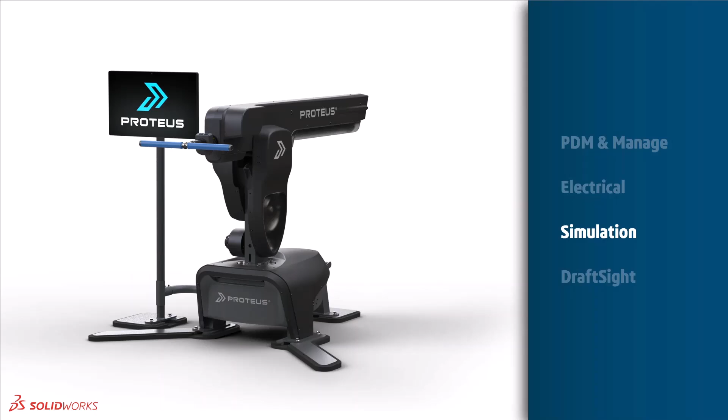My name is Ed Hawkins, and over the next few minutes I will take you through the updates to simulation in SOLIDWORKS 2025. The Proteus Motion is a training tool built to perform for professional athletes. This handle is how the athlete connects to the machine, and ensuring the athlete's safety while using the Proteus Motion is extremely important. The handle needs to be both strong enough to endure the forces of a Major League Baseball swing and lightweight enough to simulate the feel of the bat in the hitter's hands.

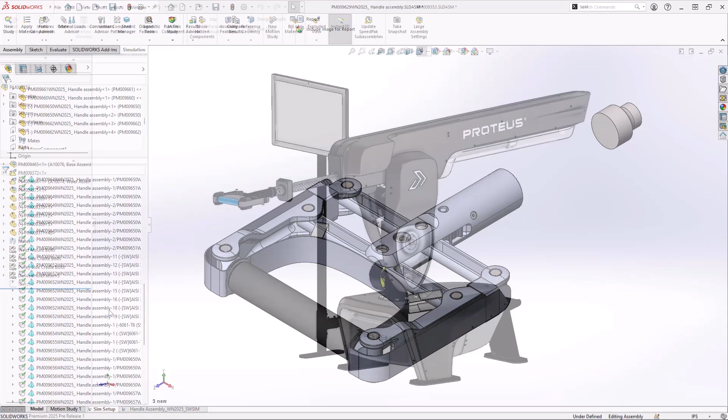It is a highly designed assembly that will need to be virtually tested to meet all of the design's criteria. Let's take a look at how we can use some new features in SOLIDWORKS 2025 to speed up the analysis of this handle and also increase the accuracy of the results.

Firstly, there are several components that are required for the handle to function properly, yet many aren't integral to the handle's structure. New in 2025, we can now select the structural components we want to keep in the analysis and exclude all the others. This is a huge time saver when working with large assemblies.

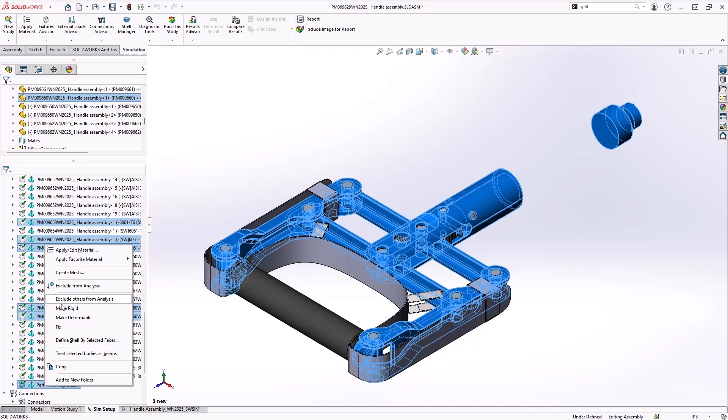These moving parts are all connected with pins. Virtual hardware is a great way to reduce the overall scope of the analysis without sacrificing accuracy. Now virtual pins can be defined using distributed coupling technology, which more accurately transfers loads to the surfaces where the pins are located, increasing the overall accuracy of the analysis.

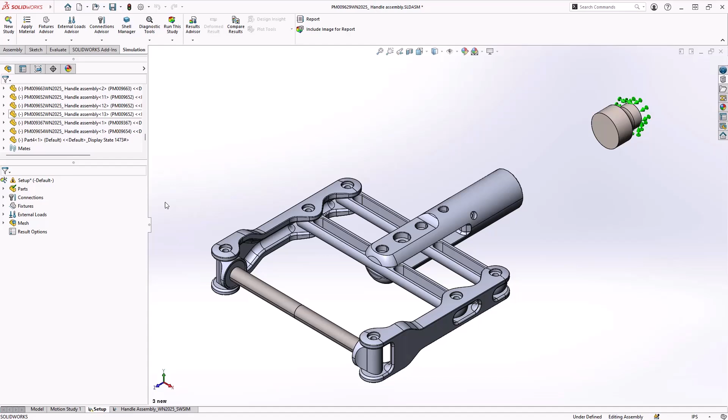This handle is connected to the rest of the Proteus Motion machine, but adding a rigid boundary condition would over-constrain the model. In reality, there is some compliance to the rest of the machine, which would act as a stiff orthotropic spring. New in Simulation 2025, a new orthotropic spring type can be defined with unique stiffness values in all orthogonal directions, plus torsional and bending stiffness as well.

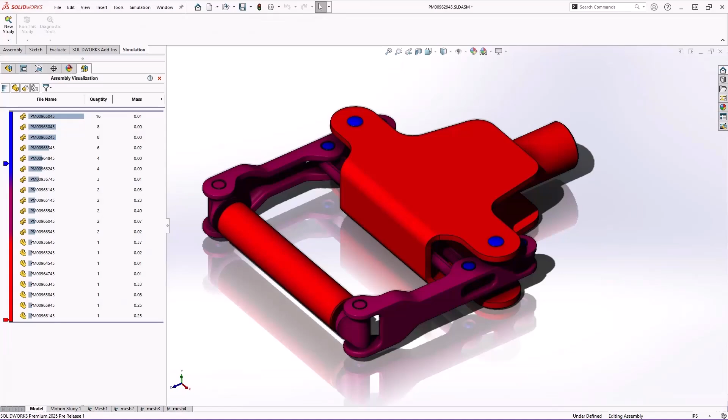Before we run the study, we'll need to mesh the model, and in 2025, assemblies that contain identical parts will mesh up to 15% faster while using the blended curvature-based mesher.

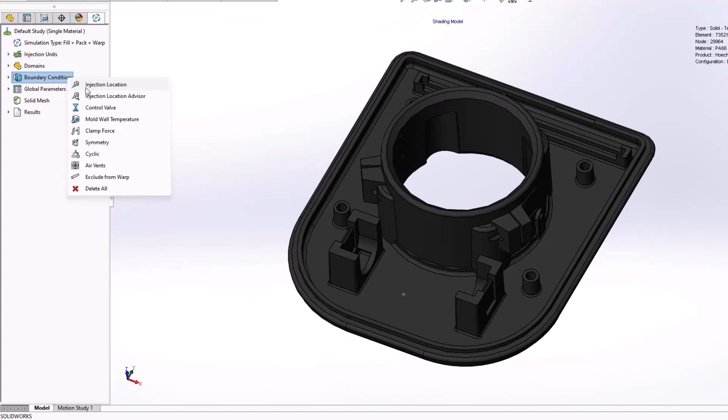Let's switch over and take a look at plastics now. Some components of the Proteus Motion are plastic. We want to make sure they look aesthetically pleasing and also fit, form and function properly. Plastics 2025 can help in designing the perfect part right from the get-go.

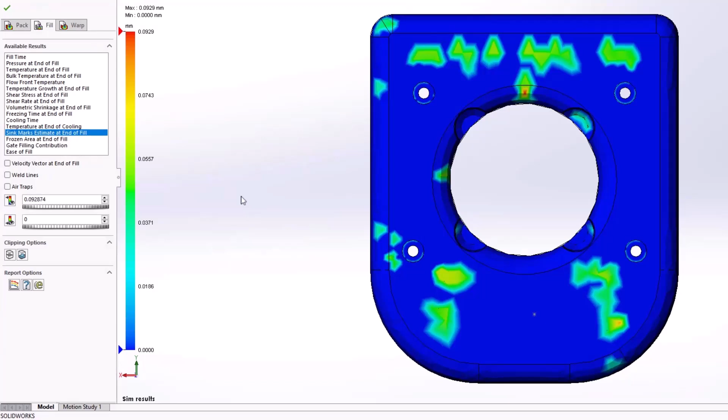The new results breaks down overall warpage displacement into unbalanced cooling, orientation and non-uniform shrinkage, giving better insights into deformation characteristics. A new and more accurate solver is used to compute sink marks. This ensures the virtual prototype more closely matches the physical one.

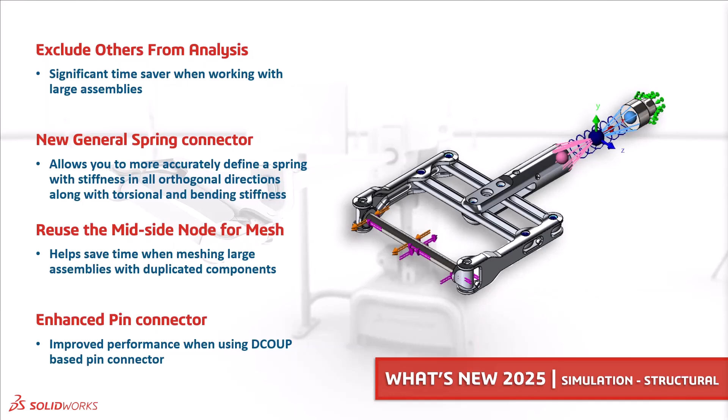So to review, we've seen a new option to exclude others from the analysis, a new general spring connector, an enhanced pin connector, and the ability to reuse the mid-side node for meshing. 2025 also gives us an improved accuracy with node to surface and surface to surface bonding.

In Plastics 2025, a new warpage result allows us to understand the causes better, and a new solver helps with sink marks across multiple components.